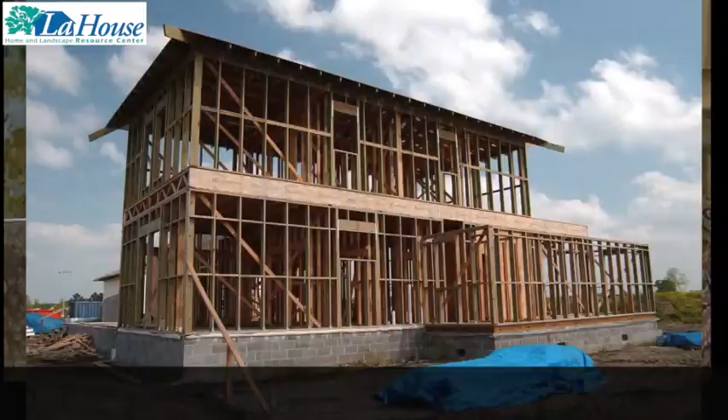LaHouse Resource Center is a showcase of solutions for producing high-performance homes for our hot, humid climate and natural hazards, all based on results of building science research. It demonstrates a range of proven ways to gain so many benefits to enjoy every day and to have more control over our lives. Think about it. As we shape our homes, we shape our future.

The foundation comes first in every building. With good planning, you can have a great foundation. In this video, we'd like to show you some things we did at LaHouse to help improve the performance and incorporate best practices in our foundation. Stick around and we'll show you what we did.

Termites cause millions of dollars in damage every year to homes. This can be prevented, however, with a good pest control program. The first line of defense is to pre-treat the soil before pouring concrete. At LaHouse, we used additional measures to prevent termite infestation. We'll show those later in the video.

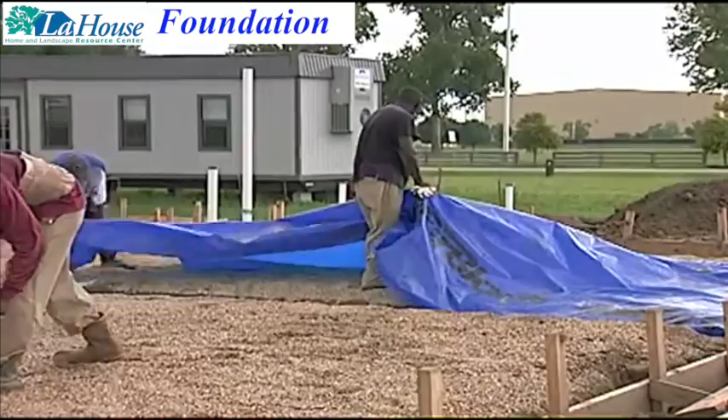Building codes call for a vapor barrier under concrete slabs in residential construction to prevent moisture migration from the ground and into the home. It is important to use an approved and proven material for this purpose. Here we are spreading the vapor barrier over the entire underslab area, including the footings. Seams are lapped a minimum of 12 inches and stitched together.

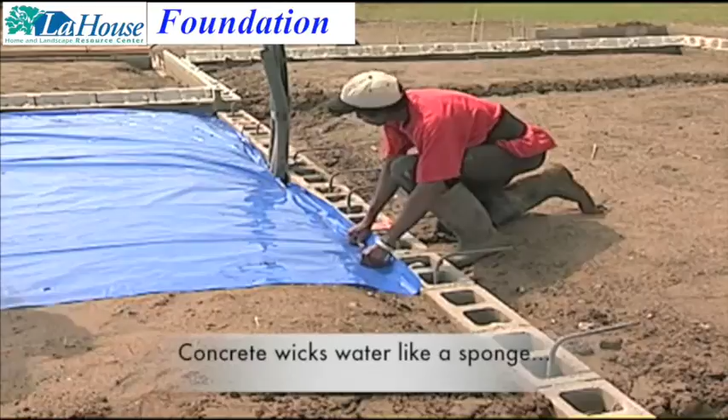On the perimeter, when necessary, the edges were doweled or pinned to keep the material in place during the concrete pour. This will prevent moisture from wicking through the concrete and into the living space of the home. In the garage slab, we used a post-tension cabling system over unstable soils that tend to expand and contract. This will prevent settling and structural problems. Once the concrete is cured, the cables will be tensioned.

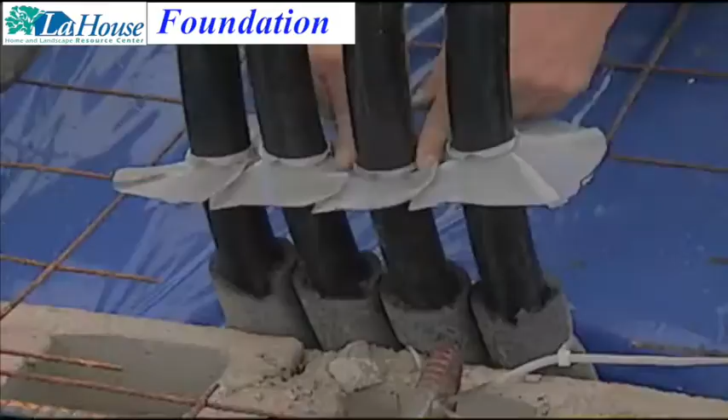Termites will try to get into the house any way they can, so you see here we put stainless steel screens around the pipe and snugged them up. This floor outlet has the stainless steel screen already attached, and it'll get a warning label to remind plumbers and electricians not to damage the screen. The screens block hidden pathways and force termites to reveal themselves on the exterior.

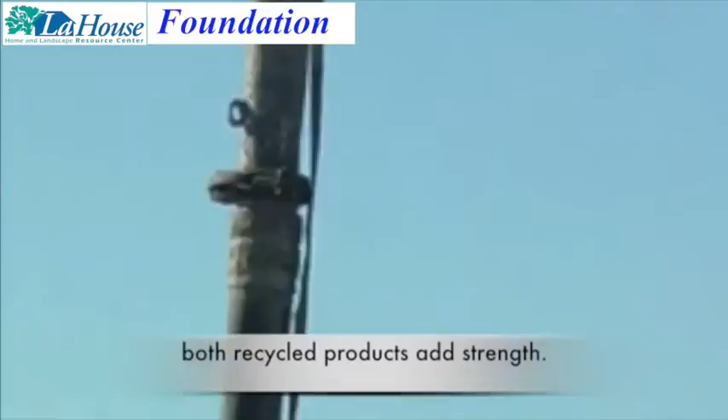And now for the big show. The concrete trucks have arrived, and the snorkel boom truck is putting the concrete where the crew needs it to trowel a smooth and level floor. Once the concrete finishers were satisfied with the finish and the location of the hardware, we covered the uncured concrete with a curing blanket to protect the concrete from the weather while it cured.

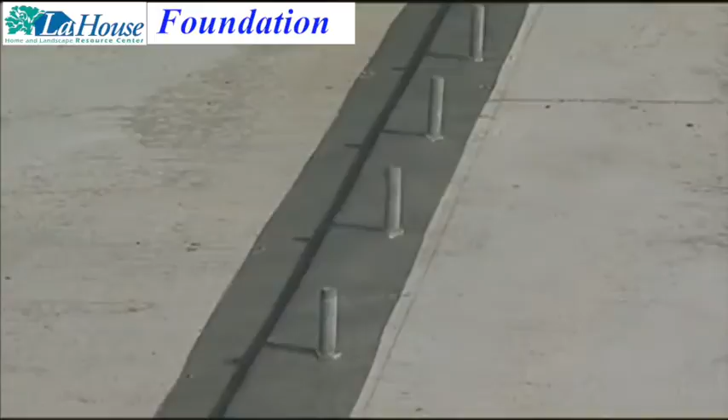When the concrete was cured enough to work on, the pest control crew returned and installed more screens wherever there were penetrations through the slab, like at these anchor bolts. Anywhere there's a place termites can get in, like at this seam or those anchor bolts, screen needs to be fastened in place and then sealed to prevent termite and pest infiltration.

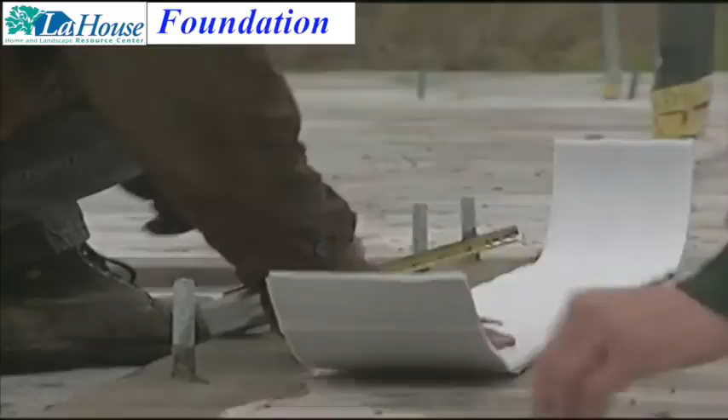The framing crew is ready to start raising the walls, but before they do that, they need to install a sill sealer where the bottom plate will bolt to the foundation to prevent air from seeping underneath the bottom of the wall. Installing the sill sealer is the first step in air sealing the entire building envelope.

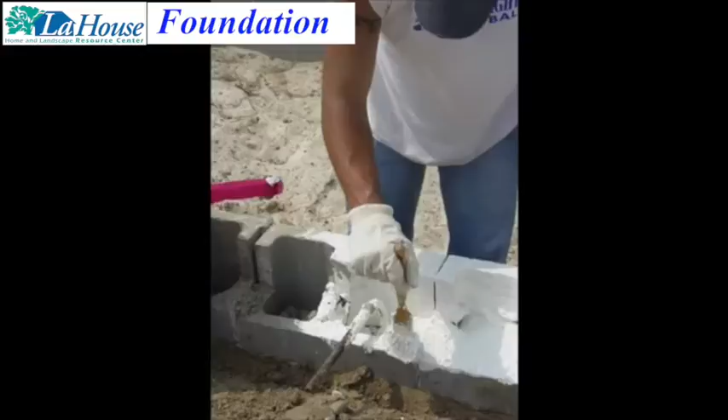LaHouse is built 3 feet above base flood elevation to reduce the risk from flooding and also to reduce insurance costs. There are 3 types of foundations at LaHouse: slab cap on CMU wall, pier and beam raised wood floors, and CMU stem wall raised wood floors. For the slab on CMU stem walls, the CMUs are filled with concrete and reinforced with rebar. Then the fill is compacted, and before the concrete is poured, a plastic vapor barrier and a waterproof coating are put in place to prevent moisture from wicking into the building.

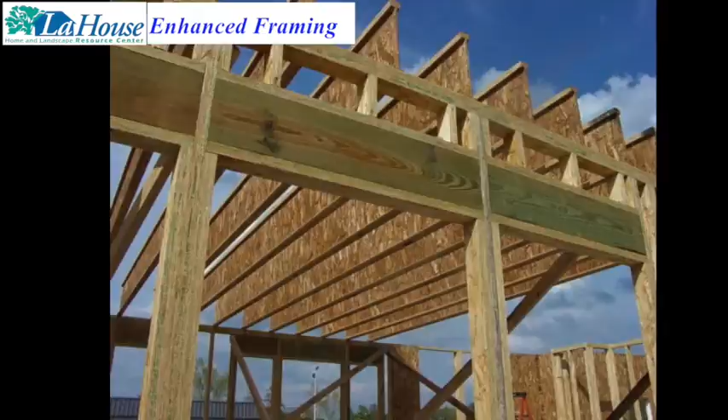The more traditional pier and beam foundation included hurricane straps to tie the floor to the foundation. Pressure-treated lumber was used here, as were corrosion-resistant fasteners to extend the life of the building. One of the 4 high-performance building systems demonstrated in the construction of LaHouse is an enhanced 2x4 wood framing used to build the midsection of LaHouse that is detailed for benefits beyond building code minimum standards.

This building system uses 2x4 wall studs spaced 16 inches apart, but is enhanced with stronger, straighter engineered wood products, with fortified features to meet the design loads of a high-wind hurricane zone. With borate treated wood for lasting protection against both decay and the destructive Formosan subterranean termite, known to cause major structural damage in only 1 year. And specially detailed for greater energy efficiency and moisture control for our hot, humid, and rainy climate.

In part 2 of this video, you'll see how the enhanced 2x4 framing in LaHouse was assembled from start to finish and why. Enhanced 2x4 framing part 2, from the ground up.

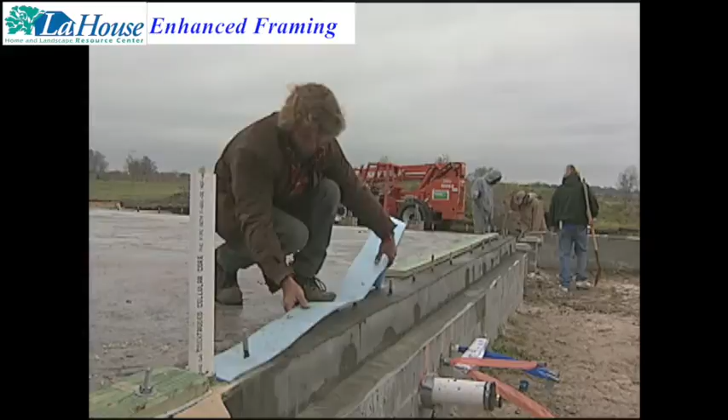A sill gasket was installed along the edge of the slab under the bottom plate with dual purposes. It seals the gap under the bottom plate to stop a major source of air leakage, and it stops moisture that wicks up concrete from wetting the wood. This is known as a capillary break.

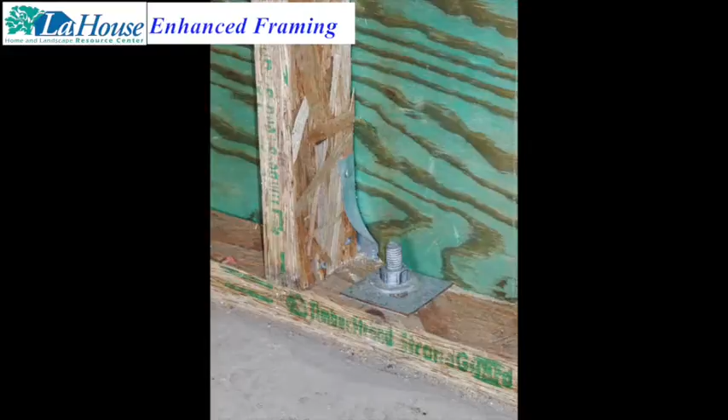Anchor bolts that were set in wet cement every 16 inches between the studs are secured with 3-inch washers for high wind resistance. Borate impregnated laminated strand lumber, commonly called LSL studs, made from local fast-growing trees, are used instead of imported lumber. LSLs are stronger, straighter, and greatly reduce waste that commonly occurs from warpage on site as well as in the production of the 2x4 lumber.

Ceiling joists are engineered wood I-beams that can span wide spaces with straight, strong support for squeak-free floors above them. Like LSLs, they efficiently use local forest products and allowed us to avoid using 2x12 lumber from old-growth trees. The roof is framed with 2x8 borate pressure-treated rafters to support the weight of the tile roof. Since the roof extends over the porches, it is supported and connected to both porch columns and attic knee walls.

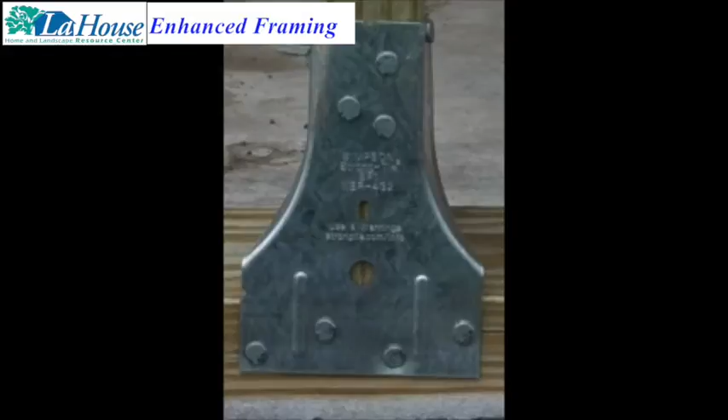LaHouse uses metal hurricane hardware to connect all of the components of the framing to create what's called a continuous load path from the foundation to the roof. In addition to the anchor bolts, the walls have plate-to-stud connectors on every stud to resist uplift forces, metal straps to tie window and door headers to framing and top plates, twist straps that wrap over roof rafters and connect them to the wall framing for greater resistance from the risk of splitting wood failures, and rafter straps at the roof peak to hold the two sides of the roof framing together.

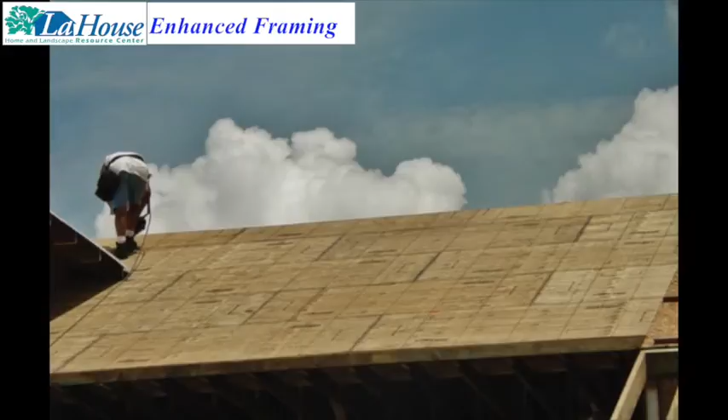Borate-treated plywood wall and roof sheathing panels offer high strength and moisture performance as well as decay and termite resistance. The fortified walls are fully sheathed with 15/32-inch thick plywood and a specified nailing pattern to resist racking, leaning forces. All edges are nailed to framing. The fortified roof decking is 19/32-inch thick and attached with special ring shank nails at 6-inch spacing to resist pullout from uplift. Notice the decking is also marked with a grid to make installation faster and more precise.

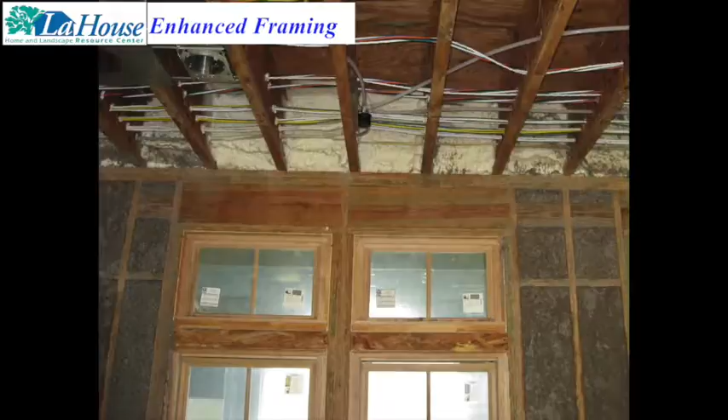To reach the higher energy efficiency standards of LaHouse, the 2x4 framed walls were enhanced. Wall cavities are filled with sprayed cellulose insulation made from recycled newspaper with a stabilizing adhesive and a borate fire retardant, providing R13 insulating value between the studs. Sprayed insulations that fill every nook and cranny without void or compression provide about 30% better performance than typical methods. Spray foam was used on the band joist between the first and second levels to both insulate and air seal.

In addition, the walls are lined with exterior rigid foam insulation panels to increase insulation value to R19 and to provide a layer of continuous insulation without the stud gaps. The front wall has a water-managed exterior insulating finish system, a synthetic stucco that allows drainage of any water that gets in. The back wall has foil-faced iso foam board with taped seams to provide insulation, radiant barrier, weather barrier, and air barrier all in one.

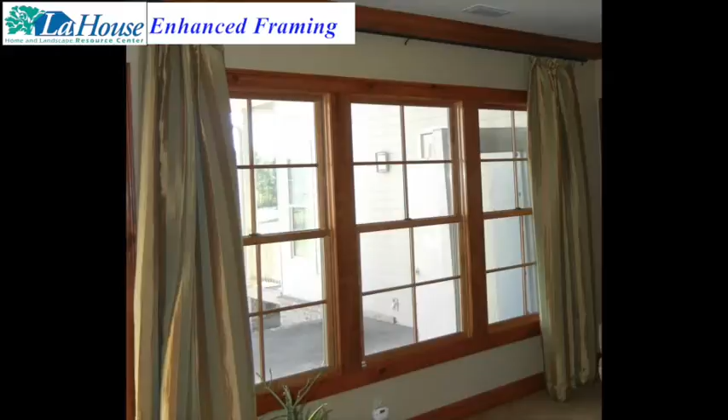And last but not least, windows and doors are the biggest insulation gaps in a wall. LaHouse has 10 types of insulated doors and windows that meet ENERGY STAR label criteria for the Deep South Climate Zone 2. The front door is a fiberglass skin insulated door stained to look like a beautiful wood door, only much better. The windows and back door have clear low-E glass with a very low solar heat gain coefficient to greatly reduce summer heat gain.

The front porch windows are wood frame with metal cladding for low maintenance. Hurricane protection is provided by removable impact-rated fabric screens that attach to anchors in the porch archways. The back porch windows have durable composite framing from recycled material and are protected with lightweight, translucent storm panels that are easy to install on pop-open tracks.

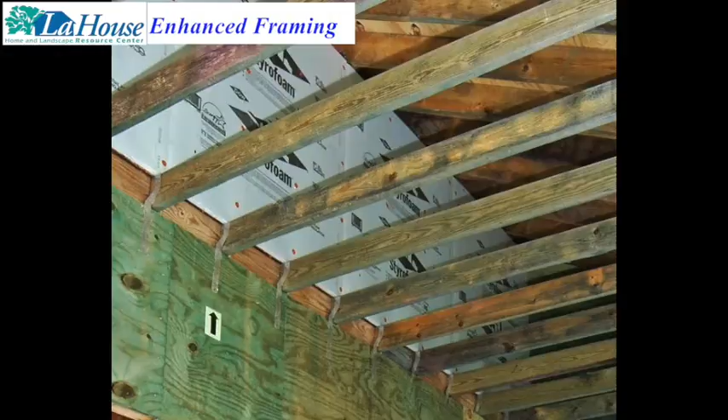The attic in this section of LaHouse is a specially detailed unvented attic with R30 open cell spray foam under the roof decking with a fire retardant coating. Plus, knee walls are insulated to R19 like the outside walls, and no insulation on the attic floor. Why do this? It does cost more than insulating the attic floor, but can offer several benefits.

Moving the insulation boundary from the ceiling to the roof line puts the air conditioner and the ductwork within conditioned space, eliminating the typically large energy losses from leaky, poorly insulated ducts in hot attics. This reduces the cooling load, so you save money by buying smaller equipment and by saving energy every day.

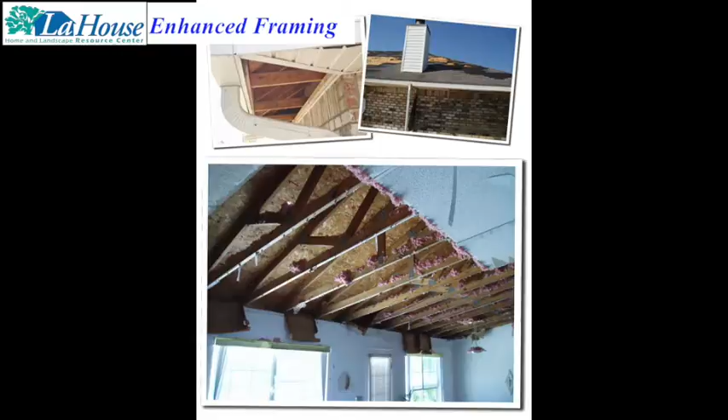The room ceiling below does not need to be made airtight, saving labor. And no soffit and roof vents omit the risk of wind-driven water intrusion in storms. With those benefits are important precautions to avoid problems.

There should be no fuel-burning equipment in an unvented attic, unless it is the direct vent sealed combustion type. The equipment in LaHouse unvented attic is all electric: a geothermal heat pump that super efficiently heats, cools, and preheats water. There is a supply register to slightly condition the space for humidity control.

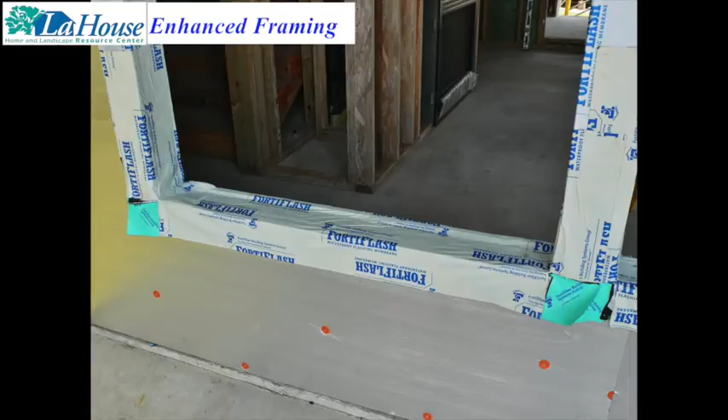The roofing underlayment should be impermeable to water vapor to prevent moisture problems. LaHouse used an adhesive membrane underlayment under the tile roofing. A few points to keep in mind. A house is a system. How it's built affects not only the energy usage, but also air quality and moisture conditions. It is possible and practical to have it all, but the details do matter.

We'd also like to pass along some lessons we learned while building LaHouse. The construction workers benefit from training in both the methods and their purposes to ensure the desired outcomes. Detailed construction documents and specifications, plus a quality control system, are especially important when methods and materials deviate a little from how it's typically done. Code requirements for unvented attics, knee wall insulation materials, and other innovations can change over time with fire code changes and new knowledge.

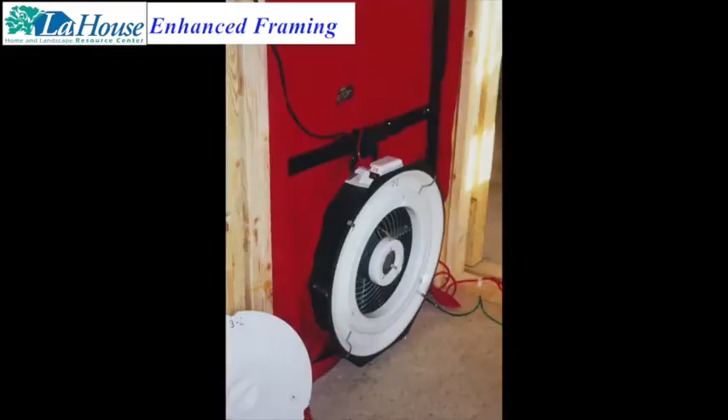In summary, conventional 2x4 wood framing can easily be enhanced for greater energy efficiency, comfort, durability, and storm resilience. An understanding of basic building science principles, detailed specifications, and quality controls such as performance testing can help ensure the best results. With strategic trade-offs, up to 30% greater energy efficiency can be achieved with little added cost. Beyond that, upgrades do add cost, but that investment can reap greater returns.

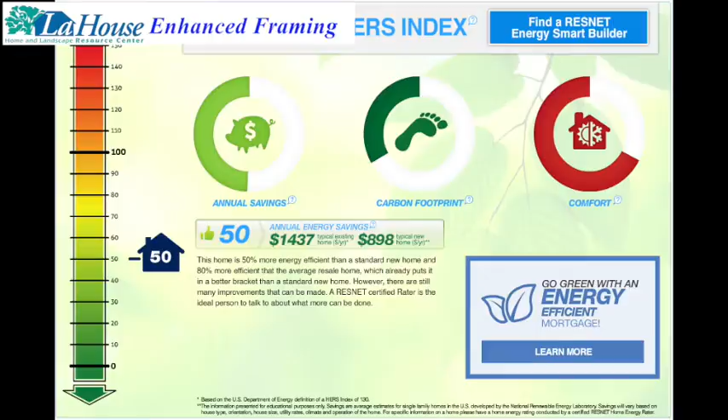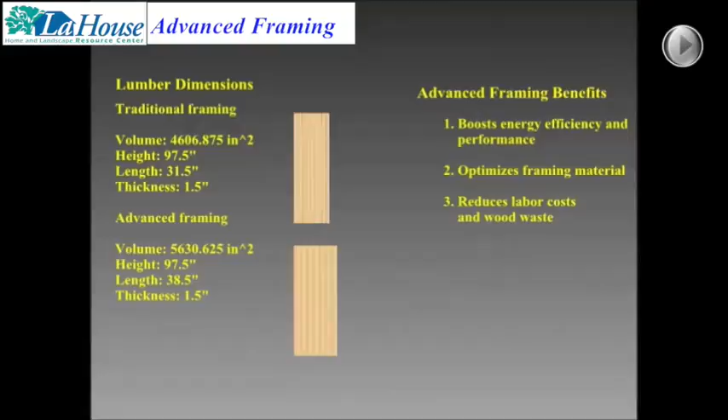One of the 4 high-performance building systems demonstrated in the construction of LaHouse is known as advanced framing, an optimum value engineered method of wood frame construction used in the 2-story west wing of LaHouse, and revealed in cutaways in the front porch closet and the laundry room. It uses 2x6 studs spaced 24 inches apart and has been shown to cost about the same as standard framing, but with more insulation and less waste, while just as strong as traditional framing with 2x4 studs spaced 16 inches apart.

Advanced framing achieves high strength, energy efficiency, and low cost by using strategic techniques that avoid unnecessary use of non-structural lumber, align openings with studs to save lumber, and take advantage of the strength gains of stacked framing, where wall studs, ceiling joists, and roof rafters are all aligned. So, despite using wider, more expensive studs, fewer are needed, saving labor and cutting waste.

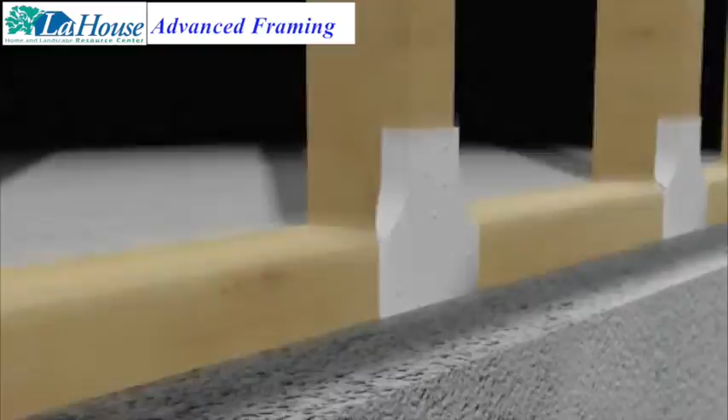The advanced framing in LaHouse was enhanced to meet the design criteria of a high-wind hurricane zone and to provide protection from the Formosan subterranean termite, the most destructive insect on the planet that can do major structural damage in 1 year. In addition to soil treatment and steel mesh termite shields, treated lumber and sheathing were used as a 3rd layer of defense against termites and decay. The stud color indicates it is borate pressure treated.

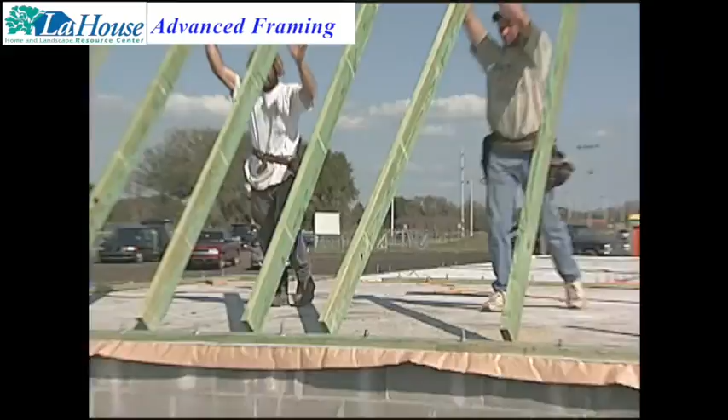LaHouse Advanced Framing Part 2, from the ground up. A sill gasket was placed along the edge of the slab for 2 purposes. Number 1, it seals the gap under the bottom plate to stop a major source of air leakage, and number 2, it stops moisture that wicks up through the concrete from wetting the wood. This is known as a capillary break. The bottom plate was placed over the gasket and anchor bolts that had been set in wet cement every 16 inches and are secured with 3-inch washers for high wind resistance.

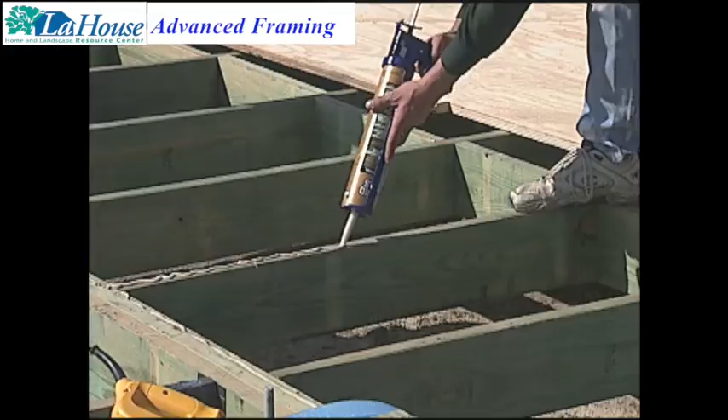The master bedroom and bath have raised wood floors to demonstrate alternative raised foundation systems. Both use borate pressure-treated floor joists and plywood decking for solid, no-squeak, durable floors. Floor systems are connected to piers or concrete block stem wall foundations with high load capacity hurricane foundation straps.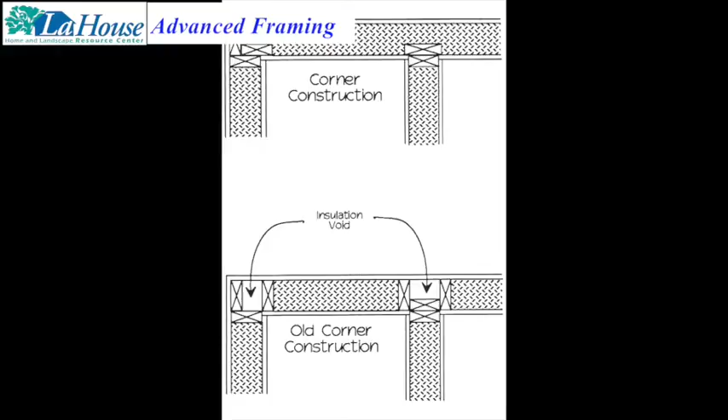Southern pine 2x6 lumber studs are spaced at 24 inches because wider lumber can be spaced further apart. Why do this? To have room for thicker insulation, and fewer studs mean fewer insulation gaps, creating a more energy-efficient wall. Typical wall framing uses extra studs in corners and in interior wall intersections to have a nailing surface for hanging drywall, but that creates voids with no insulation. Advanced framing uses energy corner details that allow insulation in corners and T-joint intersections.

Header framing over windows and doors is sized for the load or omitted when not needed in non-load-bearing walls. This saves lumber. Notice that the double header boards are placed to the exterior, leaving room for 2.5 inches of rigid insulation where there would normally be none.

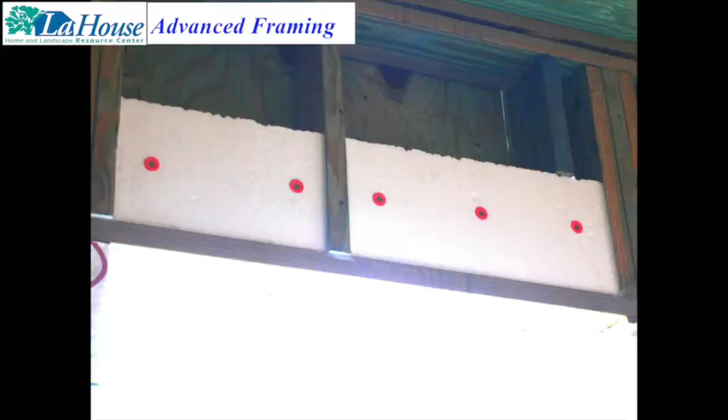It also reduces nail popping tendencies. Open web wood trusses were used between floors instead of lumber joists to allow air ductwork to run between the floors. The treated laminated strand lumber band joist between the floors provides strong stability. The band is insulated with spray foam to prevent air leaks and energy-wasting duct losses in the space between the floors. The second-story wall studs are in line over the first-level studs.

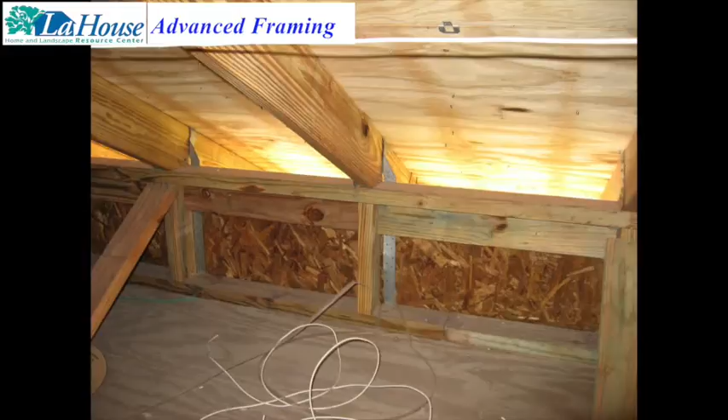Although stacked framing normally allows single top plates because of the direct alignment, LaHouse needed double top plates for its high wind load criteria. The roof is framed with rafters spaced at 24 inches, same as the wall framing. A raised top plate framing method allows insulation to fit over the exterior walls. A hip roof design is aerodynamic, so naturally is more wind resistant than other roof styles.

LaHouse uses metal hurricane hardware to connect all components of the framing to create what's called a continuous load path from the foundation to the roof. LaHouse was fortified for high wind loads suitable for coastal locations. The walls have plate-to-stud connectors on every stud to resist uplift forces, corner hold-downs to resist the forces that can push or tip a building off its foundation, metal straps that tie the second level to the first level, and

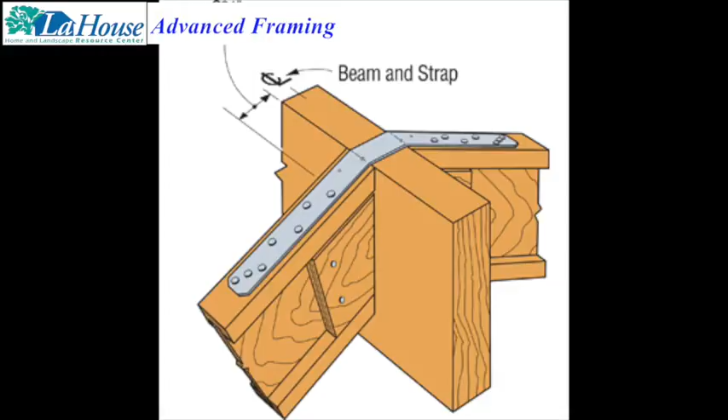window headers to framing, pre-sloped U-shaped hurricane ties connecting rafters to the top plates for extra reinforcement against uplift forces on the wide roof overhang, and rafter straps at the roof peak to hold the two sides of the roof framing together. Load-bearing interior walls are also connected for high wind forces. The master bedroom wall used tall sheathing panels that cover both the bottom and the top plates. The panels are attached with a specified double nailing pattern to resist uplift as an alternative to using metal stud-to-plate connectors.

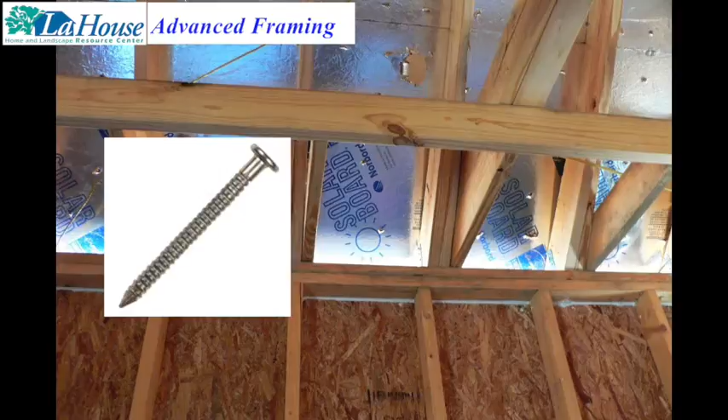This is a vented attic with ridge and soffit vents, so foil-faced roof decking was used to provide an energy-efficient radiant barrier for a cooler attic. The thicker decking is attached with ring shank nails to resist pullout from uplift. The wind-fortified walls are fully sheathed with thicker panels to resist racking or leaning forces, and are arranged so as to span and connect the first level to the second level framing. Blocking is added behind the seams so all panel edges are nailed to framing.

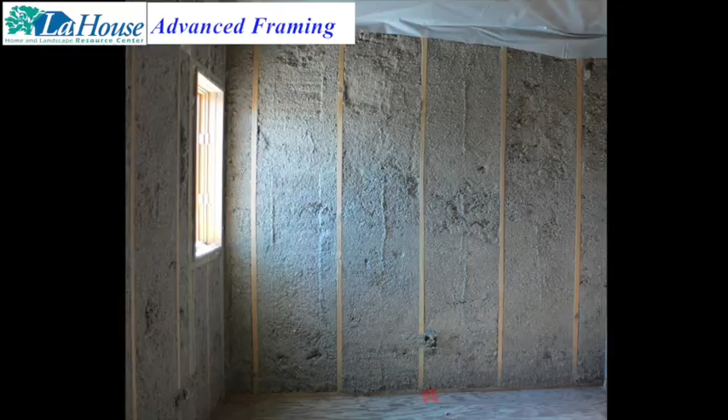Two termite and decay-resistant types of sheathing are exhibited at LaHouse. On the front side is borate-treated plywood, while copper-treated OSB sheathes the backside. Cellulose insulation made from recycled newspaper with a stabilizing adhesive and borate fire retardant was sprayed to fill the wall cavities, providing R19 insulating value between the studs. Sprayed insulation that fills every nook and cranny without voids or compression provides about 30% better performance than typical methods.

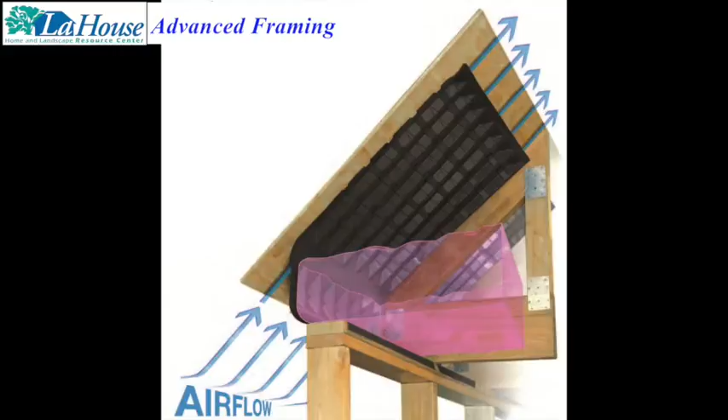In the attics, R38 loose-fill fiberglass was blown into the second-story attic, a low-cost option with full coverage. Specialized attic ventilation baffles allow insulation over the top plate while maintaining attic ventilation and preventing energy-wasting wind washing. This wing of LaHouse has 6 types of windows and a door that meet Energy Star label criteria for the Deep South. They have insulating clear low-E glass with a low solar heat gain coefficient to greatly reduce summer heat gain.

Those in the bedrooms and master bath are also high wind pressure and impact rated, so they don't need exterior hurricane shutters. The nursery windows have metal-clad wood frames to match those on the front porch. The master bedroom has strong, energy-saving vinyl frame windows and a metal door. The sidewall has economical vinyl frame windows protected with hurricane shutters. The Bahamas-style shutters also provide attractive energy-saving shade and privacy. The back upstairs office windows have high-performance fiberglass frames with an elegant wood interior.

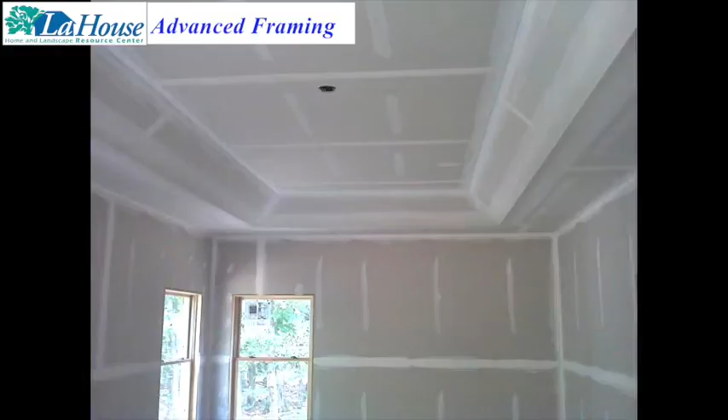A few points to consider. Advanced framing complies with building codes, even in high wind zones, but some modifications may be needed. It uses the same skill set as conventional framing, but there is a modest learning curve before you can expect time and cost savings in the construction. Finally, if there is a concern about drywall in wet, humid weather conditions becoming wavy in 24-inch on-center spaced framing, there are several solutions. LaHouse used half-inch paperless drywall with a moisture-resistant core. Other solutions are ensuring straight framing, humidity control systems, or thicker drywall.

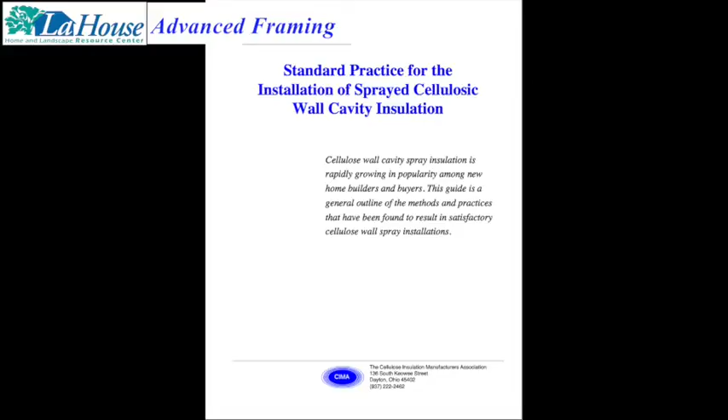Some lessons learned in building LaHouse. It is helpful to create and use framing drawings to ensure lumber-saving details and proper assembly of details, such as the energy corners. Workers need advanced training in both the advanced framing details and their purposes, as well as the quality controls required. Deeper wall cavities call for specialized spray insulation installation methods. So make sure your installers are trained and experienced in insulating 6-inch wall cavities. In summary, advanced framing provides higher energy efficiency at similar cost to standard framing, once past the learning curve.

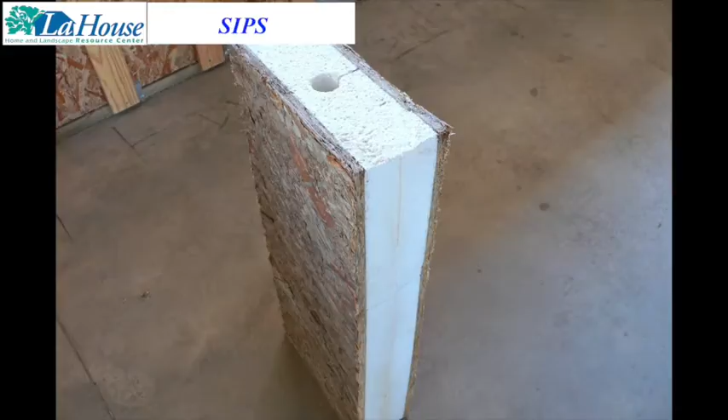Fortified advanced framing for high wind and termite resistance does add cost, but offers lifetime protection for the owner's investment and peace of mind. One of the 4 high-performance building systems demonstrated in the construction of LaHouse is a structural insulated panel system, or a SIPS building system, used to build the east section of LaHouse containing the dining room and the kitchen. SIPS panels are factory-made with polystyrene foam sandwiched between wood OSB skins, creating strong building components that provide structure and insulation in one, without the conventional framing with studs and rafters.

The panels range from 4 by 8 feet to 8 by 24 feet in size with various thicknesses, and can be pre-cut in the factory with window and door openings to fit the home plan, if desired. Either way, construction is fast, needs less labor, and a lot less construction waste to the landfill. SIPS creates a very energy-efficient building shell, much like a foam cooler for cold drinks. No stud framing means truly continuous insulation without gaps, voids, or compression. And SIPS buildings tend to be exceptionally tight, minimizing energy-wasting air leaks.

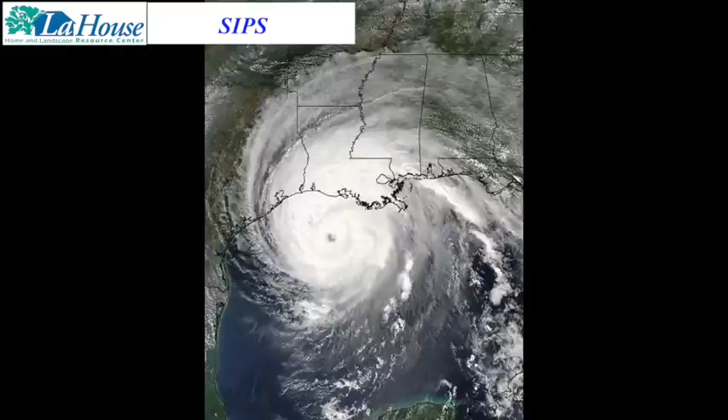Since termites can eat OSB and like to create superhighway tunnels through standard foam, LaHouse used SIPS with borate-treated foam and OSB to prevent costly hidden termite damage. The SIPS in LaHouse are also fortified with hurricane connectors to meet the design criteria of a high-wind hurricane zone. In part 2 of this video, you'll see how the SIPS in LaHouse was assembled from start to finish and why.

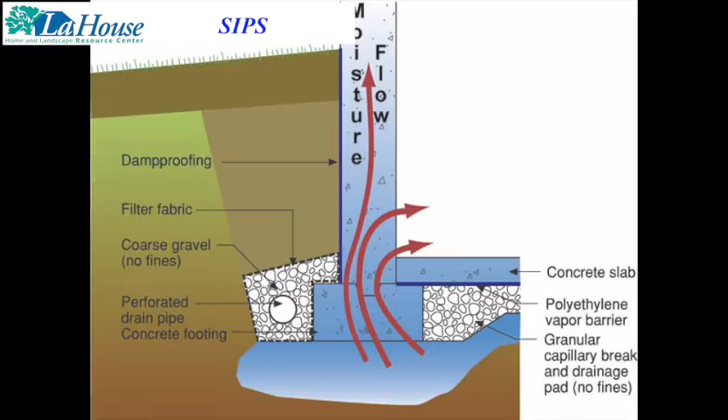LaHouse Structural Insulated Panel Building System Part 2, from the ground up. A T-shaped adhesive sill gasket was installed along the edge of the slab under the bottom plate with several purposes. Number 1, it seals the gap under the bottom plate to stop a major source of air leakage. Number 2, it stops moisture that wicks up concrete from wetting the wood. This is known as a capillary break. And, number 3, it provides a built-in flashing to protect the panel and the bottom plate.

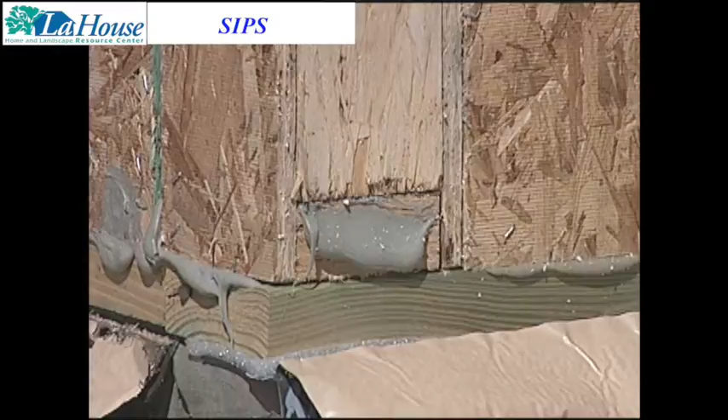For high wind resistance, a double bottom plate system was bolted to the slab at 18-inch intervals. One was inset in the SIPS panel and glued to a wider bottom plate. This made it possible to add metal plate connectors to better secure the SIPS to the bottom plates that are anchored to the foundation. The screen mesh is a stainless steel termite barrier to prevent hidden pathways.

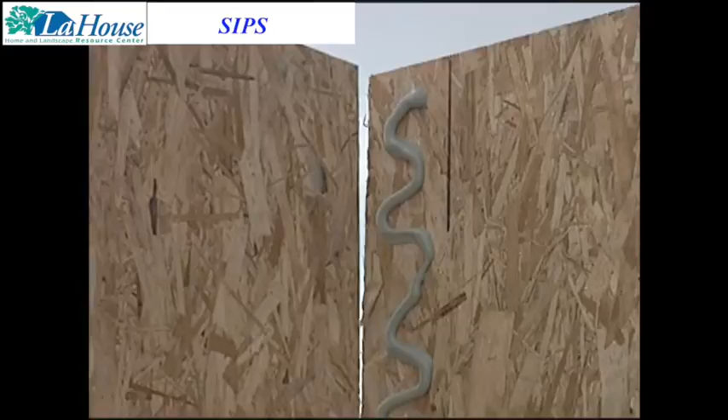4-inch thick panels of full wall height were set in place, and the seams were spliced together with manufactured splines resembling narrow, thinner SIPS strips. These splines provided a means to secure and seal the seams while maintaining continuity of insulation in the seams. Although the R14 insulation value is lower than the R19 used in the stud-framed walls in LaHouse, the whole wall performance of the SIPs is better because the insulation is continuous throughout, and it is airtight.

To allow for on-site flexibility in building LaHouse, the SIPs panels were ordered to fit wall and roof heights, and the openings were easily cut on site. To provide structural support for the installation of windows and door units, foam was routed out along the cutout edges, making space to insert lumber to line the openings.

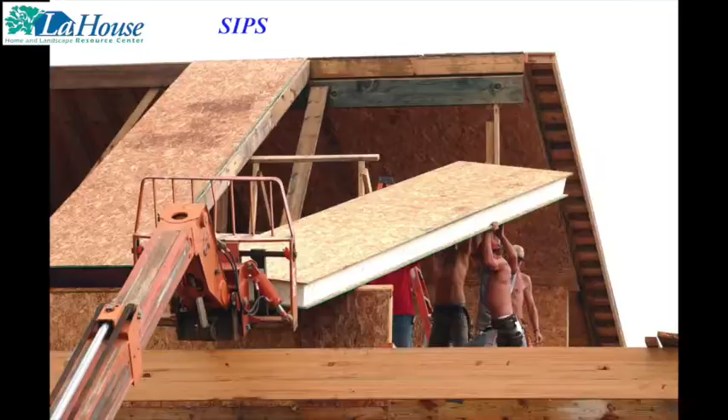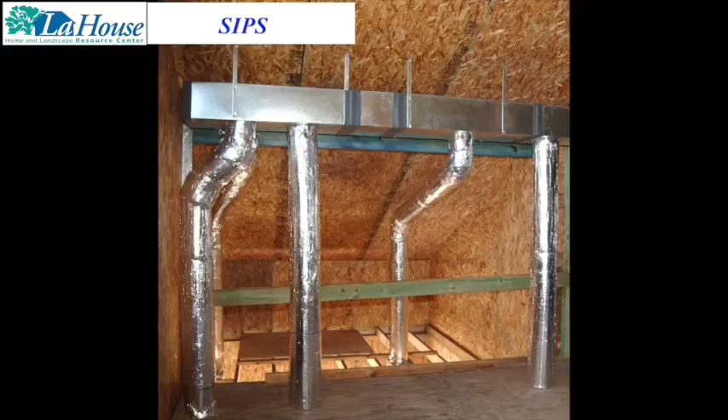To complete the building enclosure, LaHouse used 8-inch thick R30 panels, 2 alternative ways for demonstration purposes. Long panels with 2x8 rafter insets to splice the seams were raised with a crane and attached to form the roof. This creates a pre-insulated roof and an unvented attic system. Unvented, semi-conditioned attics are an easy way to keep the air conditioner and the ductwork within the conditioned space, eliminating the typically huge energy losses from ducts in hot, vented attics. This saves energy directly every day and reduces the cooling load, so a smaller, less expensive air conditioner is needed.

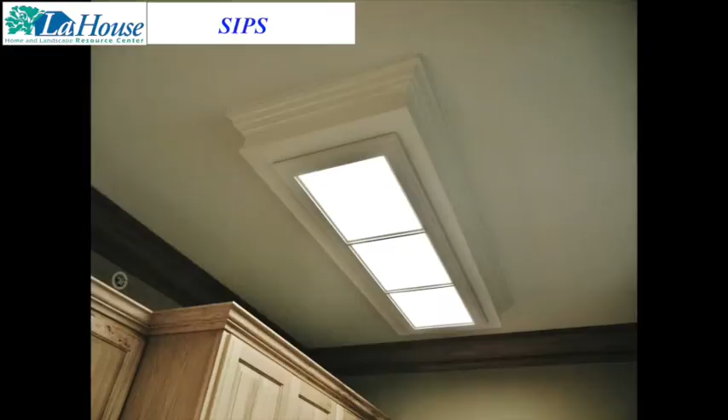If the roof design makes it difficult or expensive to use SIPs for the roof, they can be used as the ceiling instead, creating an airtight, fully insulated, walkable attic floor. This method was used over the home office and is visible through a SIPs knee wall at the end of the exhibit room. When SIPs form the ceiling, it is best to avoid cutting holes for light fixtures or other purposes. That would substantially reduce the energy-saving advantage of the SIPs system at a crucial location, where air leaks and heat transfer can have major impacts on home performance. So LaHouse exhibits a simple but elegant built-out kitchen lighting solution that avoids recessed fixtures.

Long, specialized SIPs fasteners were used to tie the roof or ceiling panels to the walls at close intervals for wind uplift resistance. The lumber splines at 4-foot intervals were also secured with hurricane straps. SIPs panels are manufactured with preformed channels for running electrical wiring.

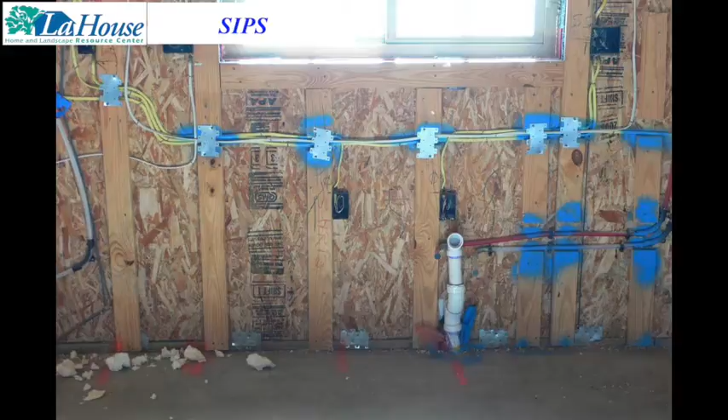Spaces are routed out for outlet and switch boxes wherever needed. Plumbing is best routed in interior wall framing whenever possible. When needed at an exterior wall, such as at the LaHouse kitchen, furring strips were installed to make space for piping between the panels and the drywall.

Because SIPs are made of OSB and foam, it is especially important to protect the panels from water and moisture intrusion, since they don't have the same drying capacity as a wood stud building system. So LaHouse used robust window flashing systems that protect the sills and corners with sloped drainage channels. The walls were wrapped with very tear-resistant non-perforated house wrap with a low water vapor permeability rating, and seams were taped. The roof panels are protected with adhesive membrane roofing underlayment.

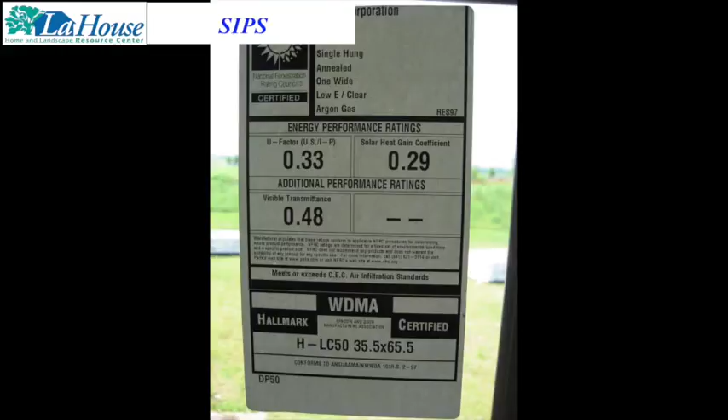With SIPs, windows and doors are the only insulation gaps. LaHouse has all insulated doors and windows that meet Energy Star label criteria for the Deep South, Climate Zone 2. The side doors are fiberglass skin insulated doors with low-E insulated glass. The windows have clear low-E glass with a very low solar heat gain coefficient to greatly reduce summer heat gain.

In the kitchen, the windows have durable, efficient fiberglass frames and are protected from windborne debris with economical accordion shutters. The home office windows have treated wood frames for decay and termite resistance. The front window is protected with decorative hinged board and batten hurricane impact shutters.

A few points to consider. SIPs homes typically cost 1 to 3% more than standard framing for custom home designs, but production builders can optimize labor and time savings to offset the higher material cost. Since there is always a learning curve in new methods, training and experience are important to ensure the most cost-effective results. An advantage of SIPs is that it results in an energy-efficient, airtight building with much less effort and attention to detailed workmanship. Yet, as with any high-performance home, it is important to build tight but ventilate right.

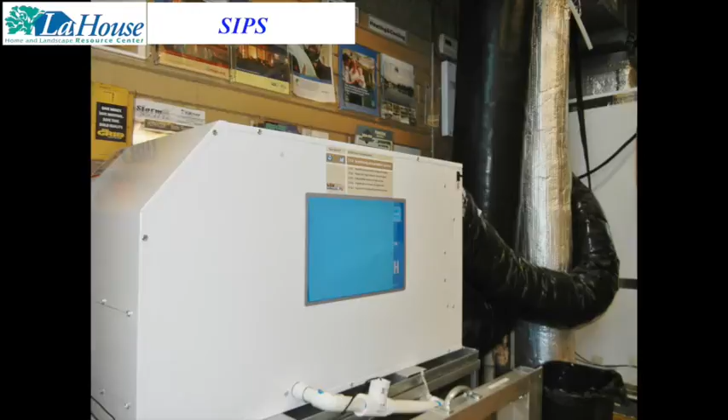So LaHouse has not only right-sized efficient cooling and heating systems, but also ducted, filtered fresh air ventilation with damper flow controllers to get clean, controlled fresh air, and a supplemental energy-efficient dehumidifier to maintain comfortable, healthy relative humidity below 50% regardless of whether or not any cooling is needed.

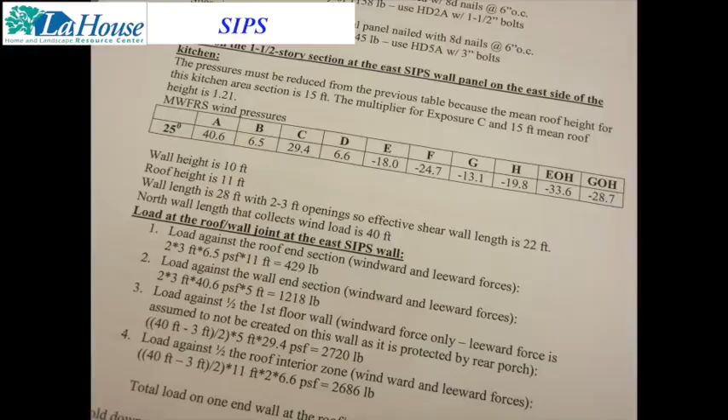Lessons learned in building the LaHouse SIPs section include: high wind connection methods are different for SIPs. Load calculations and specifications should be clearly determined before finalizing the designs and beginning the construction. Even if the construction crew is trained, other trades, such as electricians and plumbers, may be unfamiliar with how to efficiently install their systems in SIPs. Time, labor, construction waste, and material errors can be further reduced when construction plans are provided to the SIPs manufacturer to pre-cut all the openings.

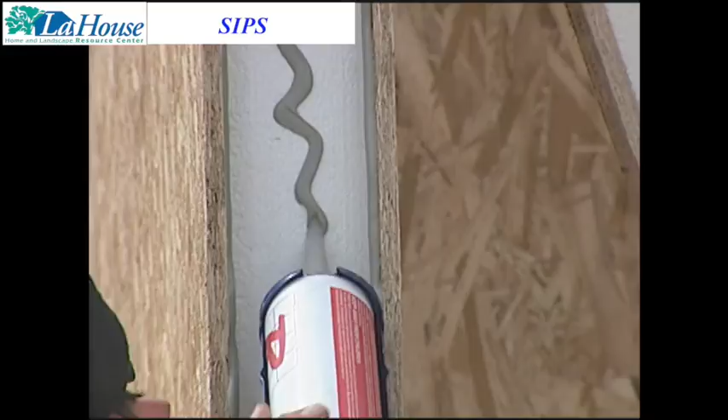In summary, SIPs create a strong and highly energy-efficient building with less reliance on detailed workmanship to achieve a tight building. Experienced SIPs builders and designers are less plentiful, but the technology is mature and has been well researched and verified.

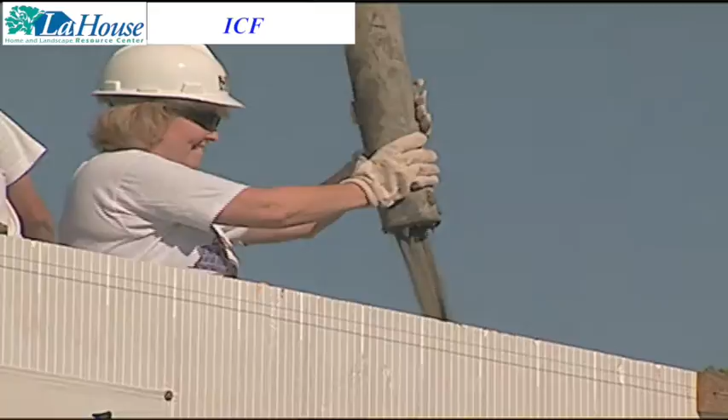One of the 4 high-performance building systems demonstrated in the construction of LaHouse is the insulating concrete form, ICF system, used to build the teaching center within the garage building. ICF construction consists of polystyrene foam panels with strong plastic connectors and steel rebar to make foam blocks that are stacked, creating a form for pouring concrete walls. The result is steel-reinforced concrete walls with thick insulating foam. So construction is fast and with practically no material waste.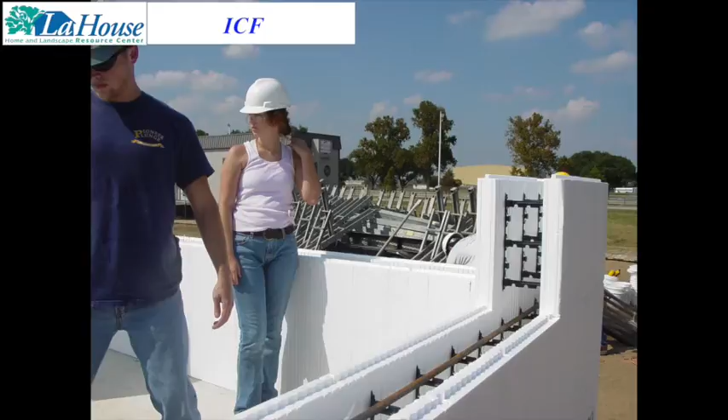In fact, a class of LSU construction management students built the ICF walls in 2 weekends with training and supervision from the experienced contractor. These ICF walls provide continuous R22 insulating value with uniform expanded polystyrene foam on both sides. The wall system is also inherently airtight. When combined with an air-sealed ceiling or unvented roof and airtight windows and doors, ICF can produce a highly energy-efficient building.

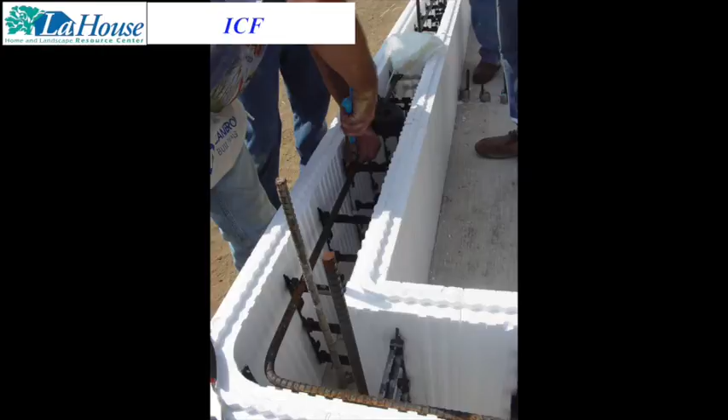Since ICF walls contain a 6-inch thickness of steel-reinforced concrete with steel rebar embedded in the slab, it is an exceptionally strong and wind-resistant wall system. In fact, ICF can be engineered to create a tornado-safe room that meets FEMA standards.

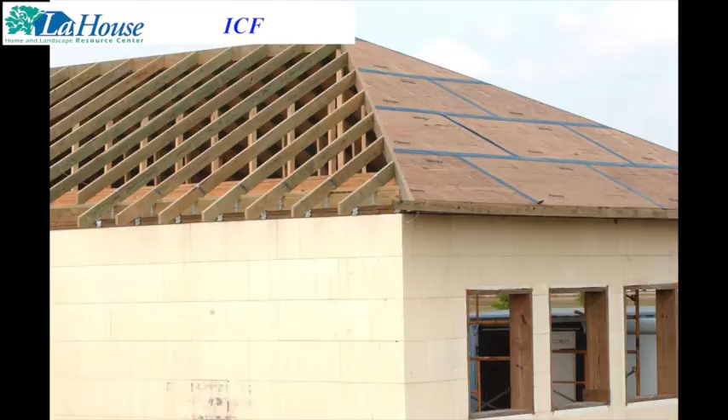Solid concrete walls are safe from termite damage. However, termites can tunnel through the foam, so the foam is 8 inches above grade to prevent hidden entry, and borate-treated structural wood was used for the roof rafters, decking, and window bucks, so the structural building cannot become food for wood-destroying insects. In part 2 of this video, you will see how the ICF LaHouse Teaching Center was assembled from start to finish and why.

LaHouse Insulating Concrete Form Building System from the ground up. The slab foundation was built to protect the building. Long-lasting chemical soil treatment provides termite protection. A strong 6 mil vapor barrier lines both the flat ground and the trenches all the way to the surface grade to prevent wicking of moisture from the ground.

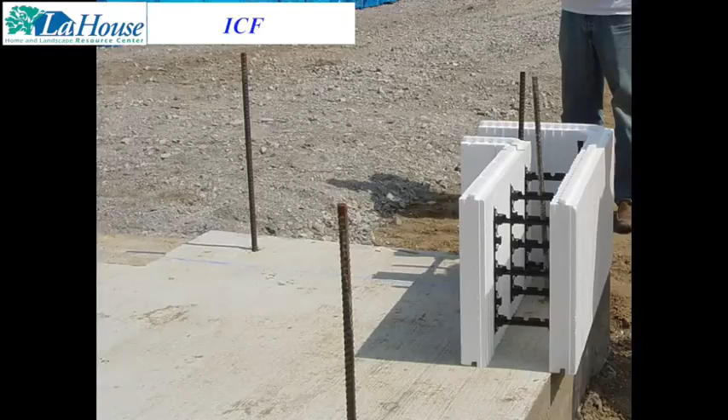And a post-tension system was used to protect the slab from our expansive soil conditions. The slab is 8 inches above grade for easy termite tunnel inspection. During slab formation, rebar was embedded every 4 feet into the slab perimeter before it cured. This served to secure the walls to the foundation.

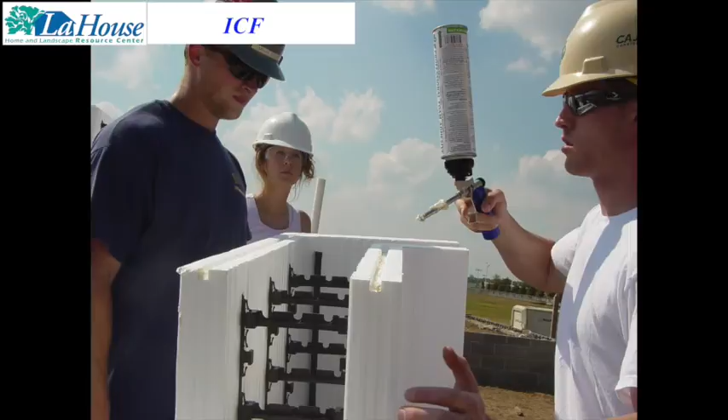Each pre-manufactured rigid foam wall panel has sturdy, high-density plastic webbing embedded in it. Connectors were snapped in place on site to create the 12-inch thick wall forms specified for LaHouse. The forms were placed along the slab perimeter and stacked layer by layer, with adhesive applied between the layers. Both horizontal and vertical rebar was installed inside the forms for each layer.

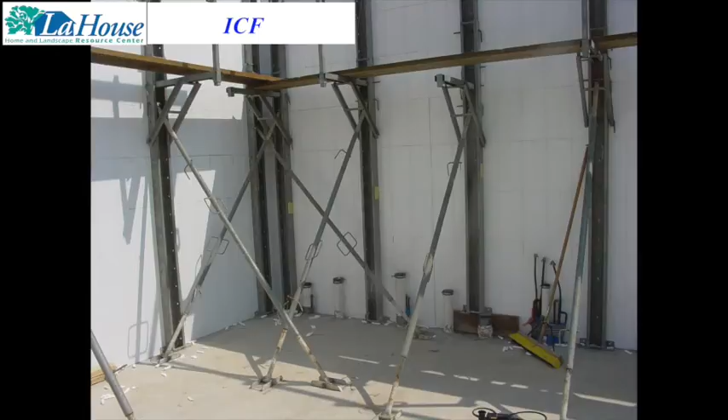The foam forms were easily cut to fit the door and window dimensions. The openings were lined with pressure-treated wood bucks for framing to attach the door and window units. After the foam forms were stacked to full height, temporary braces were installed on the interior and corner reinforcements on the exterior to support the forms during the concrete pumping. The bracing kept the walls straight and even and helped to prevent breakthrough.

Then, a low water to cement ratio of concrete was gradually pumped into the forms in layers to fully fill the cavities and to prevent blowouts from too much pressure. Before the concrete fully cured, treated wood top plates were installed with anchor bolts, same as is done in a slab foundation. Metal plates tied the top plates to the rim and the joists, and metal twist straps wrap over each roof rafter and tie it to the rim framing.

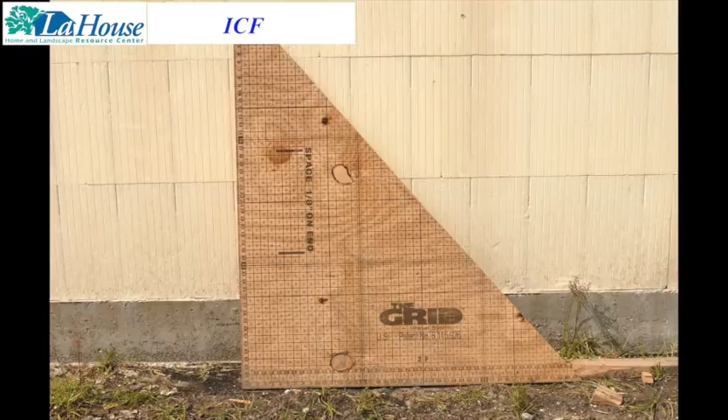Borate-treated roof rafters and decking panels offer high strength and moisture performance as well as decay and termite resistance. The fortified roof decking is 19/32 thick and attached with ring shank nails at 6-inch spacing to resist pullout from uplift. Notice the decking is also marked with a grid to make installation faster and more precise.

For a hurricane-fortified roof, the roof decking seams were taped with a roof-tolerant tape to form a secondary water barrier. The synthetic roofing underlayment installed is extremely tear-resistant. In fact, before the roofing was installed, this underlayment survived both Hurricanes Katrina and Rita without one tear.

All windows and doors are impact-resistant units with break-resistant insulated glass for protection from flying debris and providing high security. The garage door is insulated to R9 and reinforced for high wind design pressure and impact resistance. A typical garage door is normally the most vulnerable opening in a home during a hurricane, and its failure can lead to major structural damage.

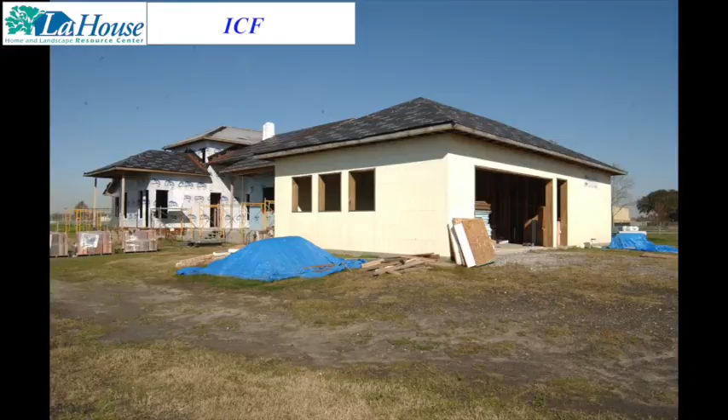In addition, a waterproofing coating was applied to the bottom 3 feet of the exterior walls. This enables the building to be dry flood-proofed with watertight flood enclosures installed at the doorways. Dry flood-proofing can qualify for flood insurance in commercial buildings, but not in homes. To top off the building's energy-saving features, R38 stabilized cellulose insulation was installed over a sealed ceiling.

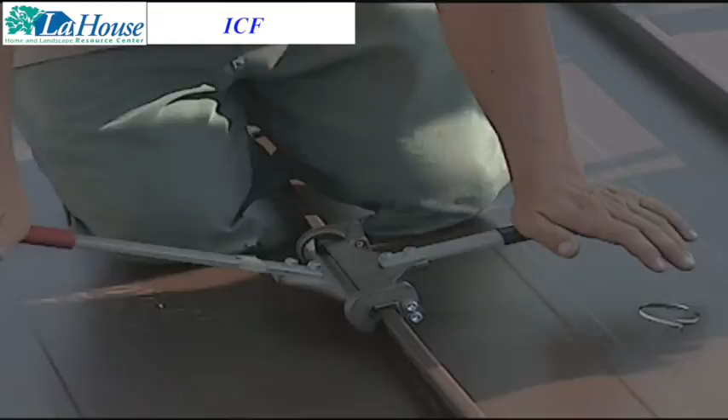A cool color metal roof is installed. The special heat-reflective paint gives the dark brown color the solar heat reflectance of a light color, qualifying for an Energy Star label. Of course, the metal roofing is also very durable, installed for high wind resistance, and is a standing seam, snap lock seam type of roofing. Since it has no exposed fasteners, it needs less maintenance and is less prone to leaks.

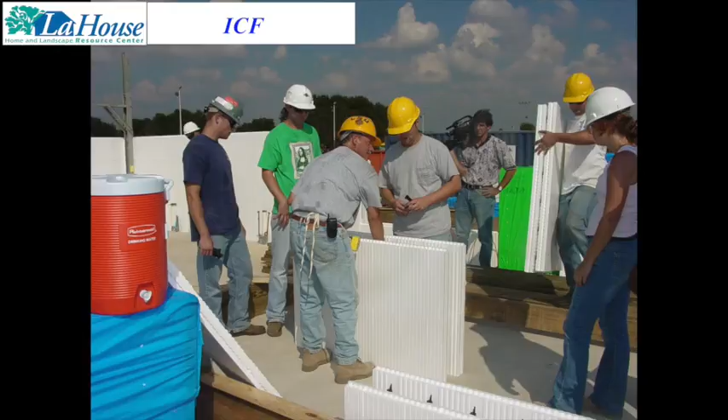A few points to consider. Plumbing and electrical channels are a simple process, but penetrations, alterations, and structural attachments involve drilling into concrete. Siding and other attachments need to align with the embedded webbing or go past the thick foam into the concrete. Using this technology to best advantage requires training, experience to get past the learning curve, and specialized equipment.

ICF building systems typically cost 5 to 10% more than standard construction, but that investment provides extra high performance in durability and energy efficiency. It is especially well suited to coastal areas and may qualify for more favorable insurance terms and discounts. To pass along some lessons learned.

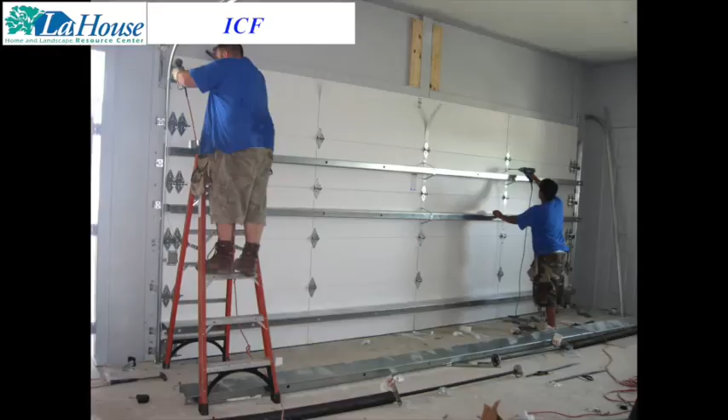All construction workers need detailed guidelines in how to properly attach things to ICF walls, since there is 2.5 inches of foam to penetrate before reaching concrete or the plastic connectors. With less on-the-fly flexibility, all dimensions, details, components, and methods should be fully determined and specified before beginning. Correcting errors requires a jackhammer.

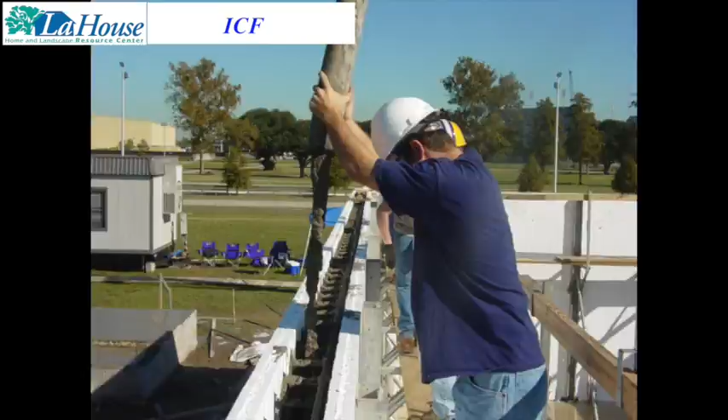In summary, insulating concrete form construction is an innovative system that offers fast, labor-saving, low-waste, energy-efficient, and exceptionally strong wind and flood-hardy building for the higher investment and a higher performance. You're invited to explore LaHouse inside and out, its cutaways, feature signage, models, publications, library, and the website, and to learn about how you can shape your future with a high-performance home.